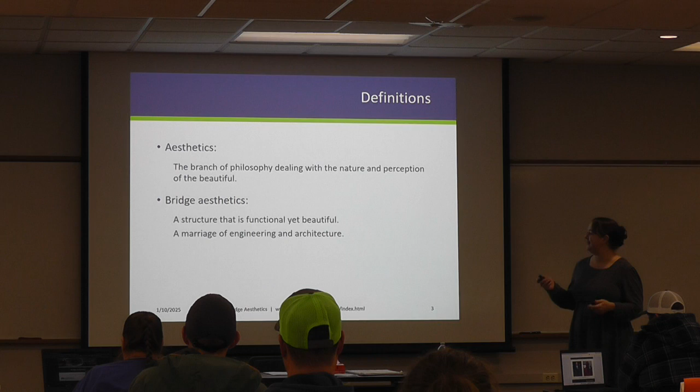So why do we do aesthetics? Aesthetics really matter, right? So somebody comes in for a job interview, who are you going to hire, right? You're going to go a little bit off of looks here, and you are definitely going to hire James Bond, right? And that is because looks really do matter.

So why? There's a few things. Obviously there is enhancing your environment, but there is a context-sensitive solution. MnDOT does not put a hot pink bridge in a state park. It doesn't work, right? So we're going to go ahead and use natural stones that are found in the region, natural colors. When you look at bridges in a lot of our communities, take North St. Paul for example. If you look at the North St. Paul downtown, it's a lot of concrete textures with brick. Well, what did we do when we built the highway? We did a lot of brick and a lot of those same concrete textures.

We really try and match the context of the area so that everything can fit in and really create a cohesive community design. Wayfinding is really important. So most of us do not give directions north, south, east, west, right? If I'm going to tell you how to get to my house, I'm going to say look for the field with the big creepy tree. It goes turkey, pheasant, duck, take a right. We're not using north, south. We do the same things with our highway systems. So we design a lot in corridors. So 36 looks the same, 94 looks the same for segments of it. So when you get on the highway, you can look around and go, man, I know where I am now. I recognize this visually. I might be going the wrong direction and I need to turn around, but these visual cues tell me where I am.

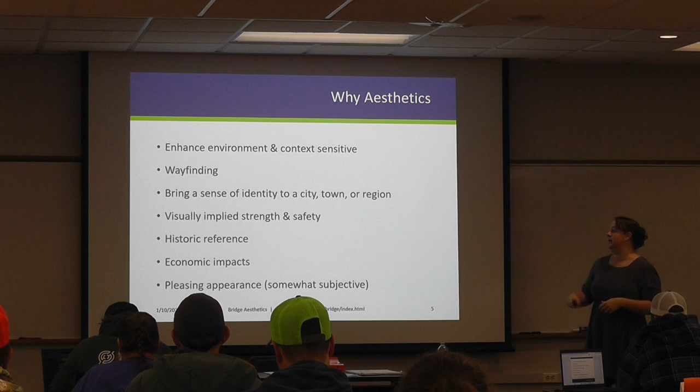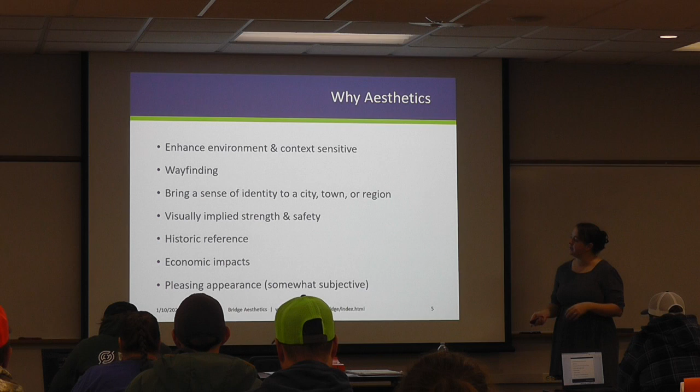So we beef certain things up to make it appear safer, and that makes the public feel more comfortable. Historic stuff, there are historic structures that have federal oversight, so I usually don't get involved, but there are specific guidelines for aesthetics when historic involvement is there. There are economic impacts as well.

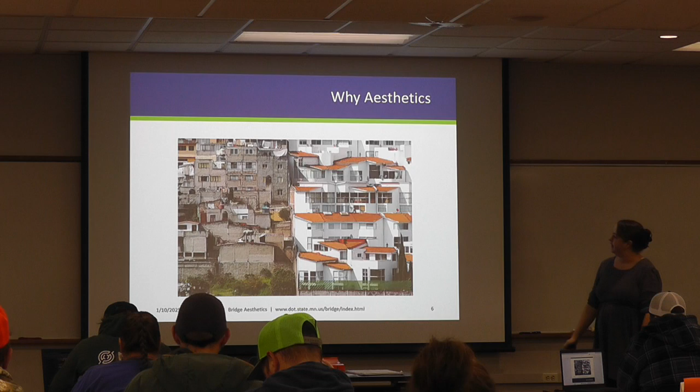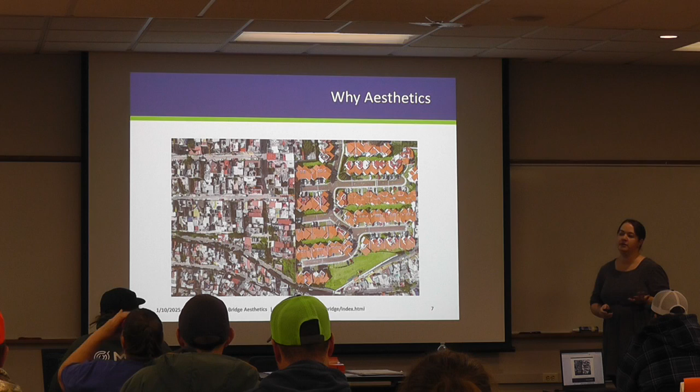Take this picture for example. These look like two images of two different neighborhoods that look split, but this is actually what it looks like from the air. We don't want to do this. In Minnesota, everybody, all the taxpayers, kind of get equal funding for aesthetics. We don't want to create higher funding levels in one area than another. It doesn't matter if you're in Starbuck, Minnesota, or Minneapolis, Minnesota, you are going to have the same type of funding and aesthetic level put into the process. The structure dictates what you get.

Here is a great example. These two communities are almost identical. They have very similar crime rates, very similar wages, all the different things are similar between these two communities. Amenities, all the things. If you're a traveler driving through on your road trip, where are you going to stop? Where do you feel comfortable, especially if you're a woman? Where are you going to feel comfortable getting out of your car? Where are you going to feel like you can come spend your tax dollars?

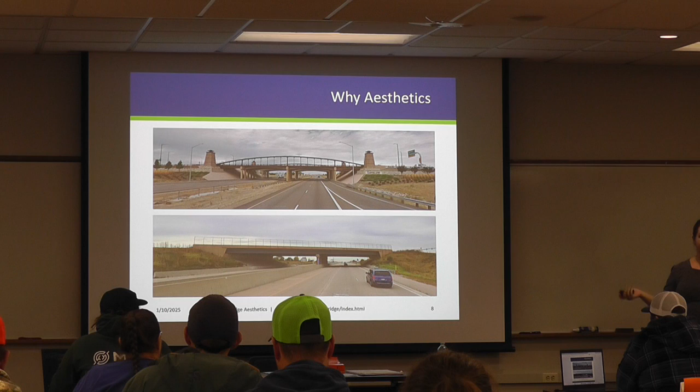You're going to go there, right? This is Loveland, Colorado, and this is over in Wisconsin, Eau Claire. So like I said, they're both very similar areas, but the aesthetics are going to dictate where travelers spend their money. That can really impact the neighborhoods, and it can impact the business owners that are right off of these exits.

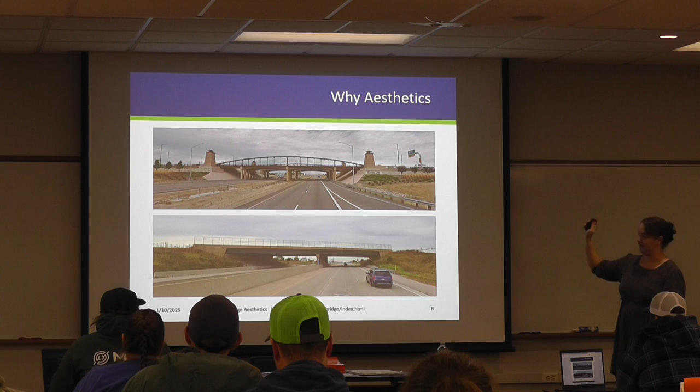So aesthetics are important. Now that is pretty above and beyond. MnDOT wouldn't pay for that, but they have a lot of pot money, so... it's true, it is true.

So we kind of have the 4 C's of bridge aesthetics. Context, like I talked about, that state park idea. Comprehensiveness, this is a big one. We don't actually try and spend every penny. Each bridge has an allotted dollar amount, and we don't try to spend every penny of it.

I have a good example of this. We had a bridge where there were some city councilmen involved, and we got really focused on the dollars. There was still some money left over, and he was like, well, what if we take these steel circles and mount them to the side of the bridge? And I was like, polka dots? We're gonna put polka dots on here? He was so focused on spending the money that he wasn't focused on the fact that the bridge design was already really great. We didn't have to spend that money and try to find ways to add features, we already had it. So we really want to make sure that design is looked at comprehensively.

Cost, we all have a budget, that's what we do. And again, constructability, don't try to make it harder. Although I joke with the engineers, if you make me angry, I will make it round.

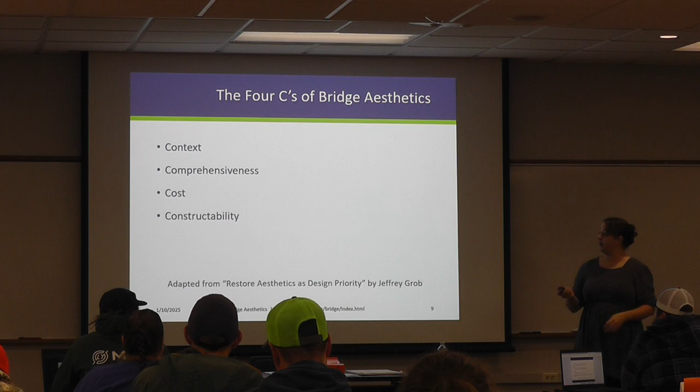So here's MnDOT's cost structure. We have level A, B, and C bridges. Your level A's are your Stillwater River crossings, your Blatnik Bridge, your really major river crossings, Hastings. The average bridge you're going to come across is going to be a B or a C. A B is everything in the metro, usually with pedestrians above or below it, a closer interaction, or it's in the metro where you have a high volume of viewers. A level C is probably only viewed from above or below. It does have some aesthetics, although most level C bridges don't get any, just because there's nowhere to really put it. They're usually small structures, tiny abutments, that sort of thing.

So how it works for most bridges is 7% of the total cost of the bridge, not to exceed $300,000. For the most part, the aesthetics you see around the metro fit within that budget, so we're usually not spending more than $300,000 on a bridge. If something does have a super high level, like Loveland, Colorado, that means outside partners kicked in funds. And when we get into the public art realm, that could actually be individual citizens, separate from any government entity.

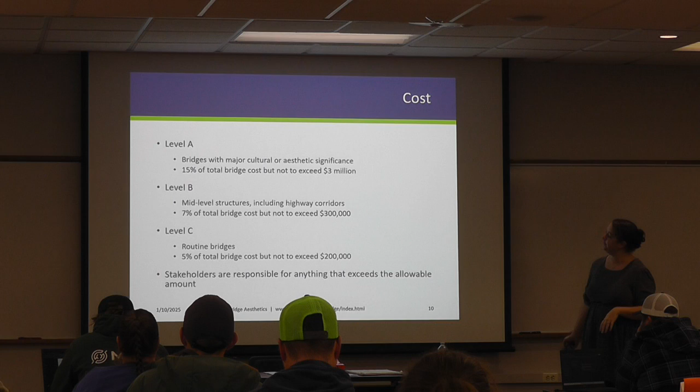Some things we do, like natural stone, we don't do that often. It's really cost prohibitive, but in this case we have done it in some places. This is up near St. Cloud, right near Granite City Quarry. You put granite on it, right? That just kind of makes sense. I believe we probably got really cheap stone because they wanted to use it as an advertisement right outside their business.

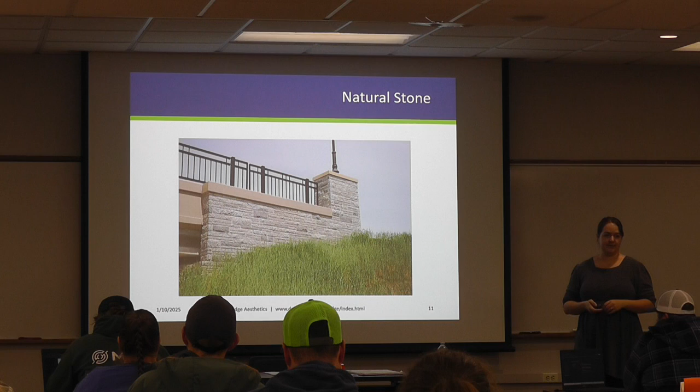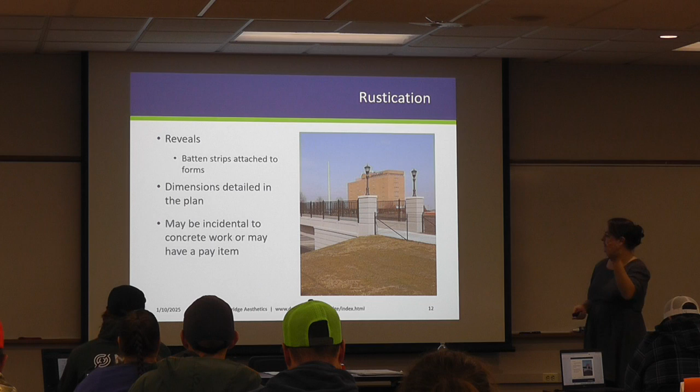Another thing that we do often is just batten strips attached to the forms. This is just going to break up big walls, kind of makes it look like stacked stone, fairly easy to construct. Usually doesn't have a pay item, it's probably just incidental to the concrete work.

Insets are another thing, just adding some insets to the form, trying to break it up, create some shadows.

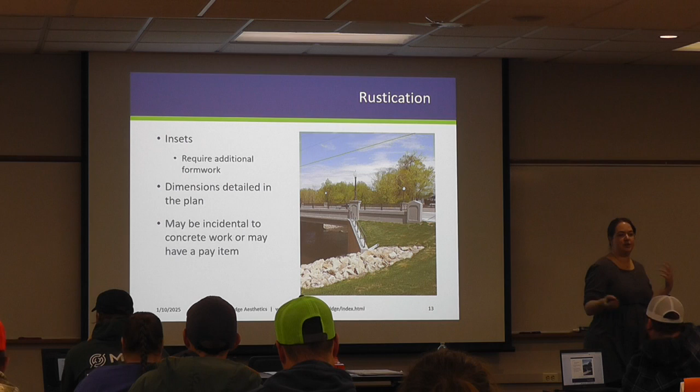We also know that, now this doesn't always work, but adding texture to surfaces reduces graffiti, especially if it's a very rough texture. It doesn't always stop graffiti, but it does reduce it because it makes their artwork harder to read, and it also takes a lot more paint, and graffiti artists have a budget too, and we need to remove that graffiti very quickly. So if you ever see cases where we put really heavy textures in some weird areas, that might actually be why. That might have been part of the conversation: graffiti reduction.

Especially when it comes to our new noise walls. Our new noise walls are noise absorptive. So if you actually get very close to them, they're very rough and have little holes all over in them. That's so the sound can go in and bounce around in that hole and come out. It doesn't reflect that sound back.

Ribbed textures were really popular in the 70s and 80s. Somebody not too long ago told me that this is warehouse chic. I think it's pretty well fallen out of favor in most of the metro. I don't have any communities asking for this type of texture anymore, but it's very common from bridges in the 70s and 80s.

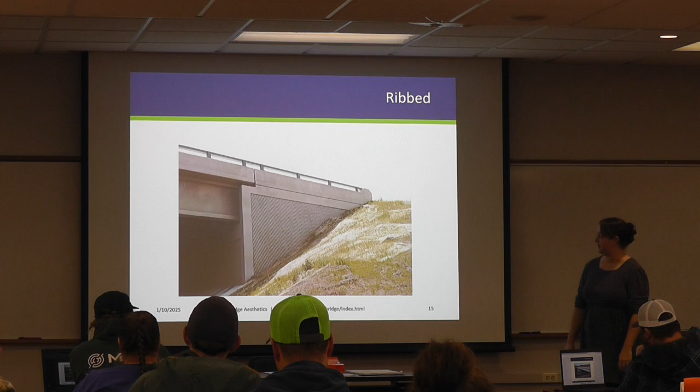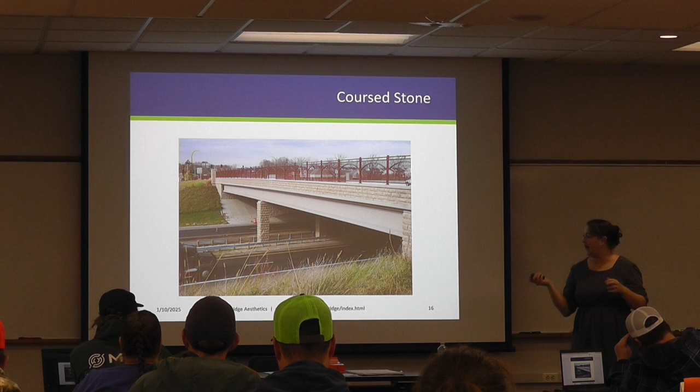Coursed stone - Minnesota has a ton of limestone quarries. So in mid and southwest Minnesota, in that whole area, you're going to see us use a lot of coursed stones, ashlar stones, just because that is the stone that is normally in the region. We are just replicating that with form liner.

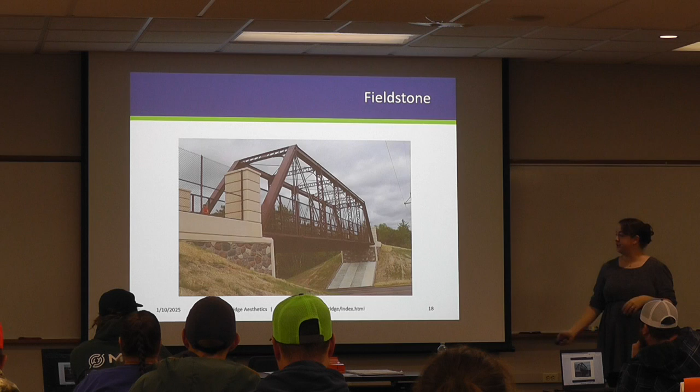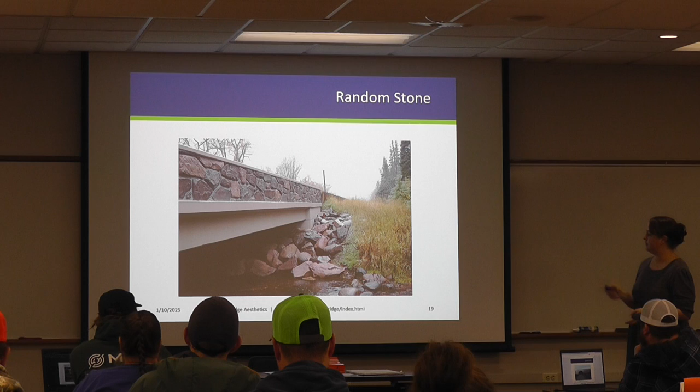Northern Minnesota, you're going to see a lot of field stone. This is all up Highway 61, on the North Shore. This is an example of exactly what you want to do. You can see that the local stone that was brought in for the riprap matches that form liner. That's what we talk about when we see cohesiveness, comprehensive design, context-sensitive design. This is a project where everything is done right.

We do occasionally do custom form work, usually not, because that will bump it up outside of the aesthetic allowance. It also takes a lot of design time, and I'm only one person, so there's only so much that I can do. This will occasionally happen when you have consultant firms, but not too much because it is more expensive.

Form liner materials - this is where you really want to watch out for in the field. This is EPS foam. We do not allow that on our projects. We will look at it on a case-by-case basis, usually on a smaller project where there's not a lot of forms, probably not going to be replicated, and it can't be near water. If you look at that, obviously, when you start tearing it off, those little beads are going to be floating down your waterway. That's a big no-no. If it's a smaller project where we can contain it, we will allow it.

It used to not be allowed at all because form release agents weren't great, and so those little beads would get stuck in it, and it would just be a huge pain for everybody. But now technology has gotten so much better that we will look at that on a case-by-case basis. Always ask, because of the cost difference between that and what is in MnDOT specs, and most other places do use MnDOT specs - a lot of cities, even North Dakota uses our specs in a lot of cases.

Make sure you're getting a discount because that cost difference is very big. So that is very commonly snuck in as something that they want to use because they know they're pulling the wool over your eyes and getting something for cheap.

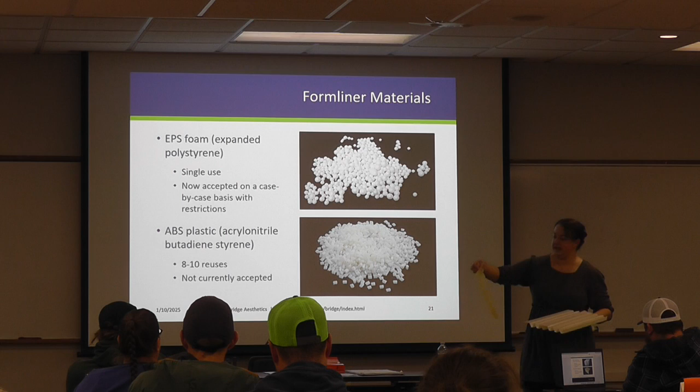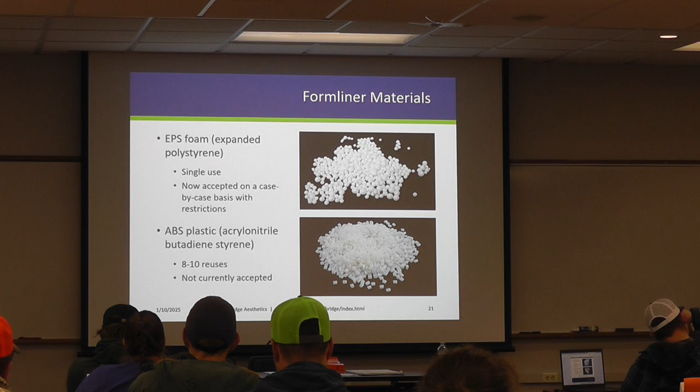ABS plastic, this is something that we do not allow. We would potentially allow it in something like this where they could backfill these, but it becomes very brittle, and you can see it will break. We found over time most of this does not stand up to concrete pour pressures. Sometimes it will be allowed, but usually not. They'd have to make a case for it.

HDPE plastic, this is a newer one. We haven't used it very much. This is a very, very heavy plastic. I always say this is like a cast iron frying pan - you want to keep some of this by your bed, and if there's an intruder, whack them with it, because this stuff is heavy duty. Usually this is going to be very unique forms, cut with a router of some sort, and you can do unique shapes. As far as I know, we've only used it on 2 projects so far where there were kind of curves and very unique shapes. But if this is ever requested, let us know, because we do want to see how it works over time.

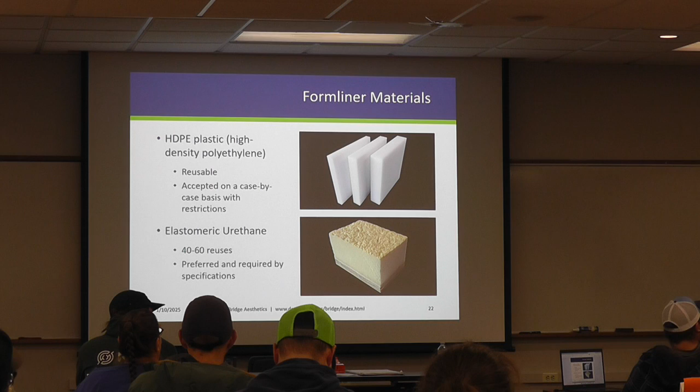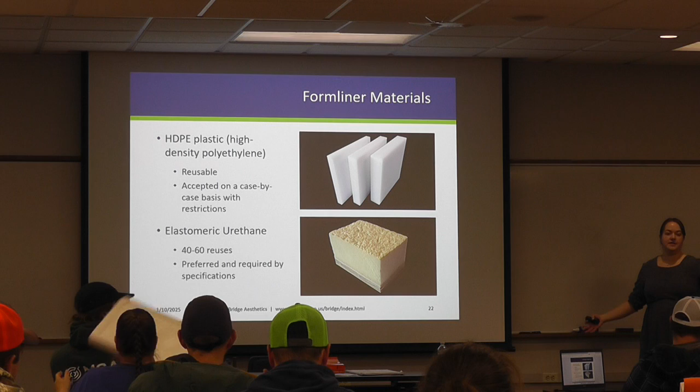And then this is elastomeric urethane. This is what is in our specs as the standard product. This is created, most of it, in Minnesota or just over in Hudson, Wisconsin. That is a reusable product. Please make sure that they are throwing them away at the end of their shelf life. They can use these over and over again, up to 40 to 60 reuses. Since a lot of our corridors are in the same textures, they will try and use them past their life, so just make sure the really bad ones are getting thrown away.

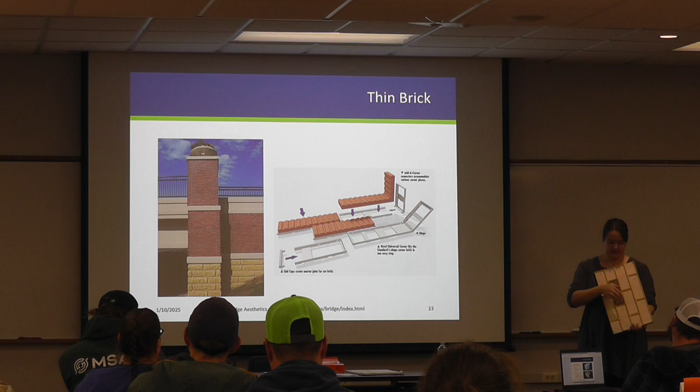And then thin brick. This is a super popular product because Minnesota made a lot of brick. You go into any tiny town in Minnesota, it's brick, right? We made a lot of it here. This product is finally something that is affordable for us to use and is lasting very, very well. And then graffiti removal is just pressure washing - there's no anti-graffiti coatings or repainting or anything like that, so it is very, very nice. How this is actually done is these little pieces are stapled to the forms. The brick is set in the little piece, and then the concrete is poured, the form is pulled off, and your brick is stuck. So the actual concrete makes up your mortar joints.

This is all of Highway 36, Valley Creek Road and 494. So when you look at the cost difference between these two, you have your brick, which does have a higher cost of construction. But then when you look at the form liner below it, you have the construction cost, the painting cost, and now the anti-graffiti coating cost. So cost-wise, they actually flush out as pretty even, but there is a little bit of messing around with those bricks. We are getting better with it over time as we work with it and kind of figured it out.

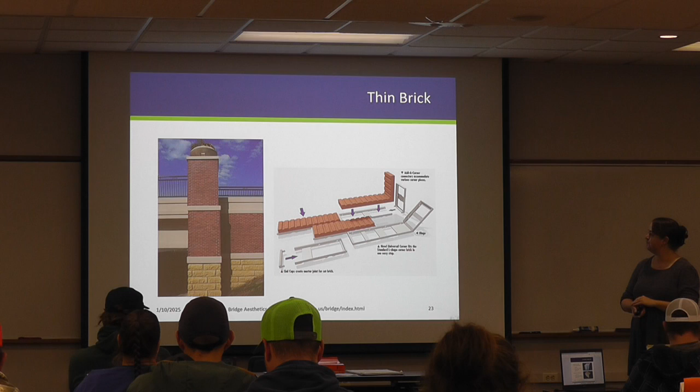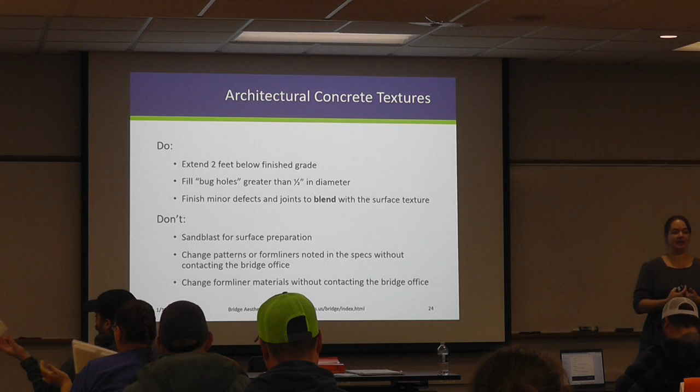And then any changes, please contact the bridge office. It might not seem like much of a change - most of the time we're approving them, but sometimes there's bigger issues. So if they say, hey, we want to use this texture here, and it has 3 inches of depth, and we only specify 2, we now might not have enough cover over our reinforcement, so we want to deny that. So that's the type of stuff we're often looking for when changes are requested.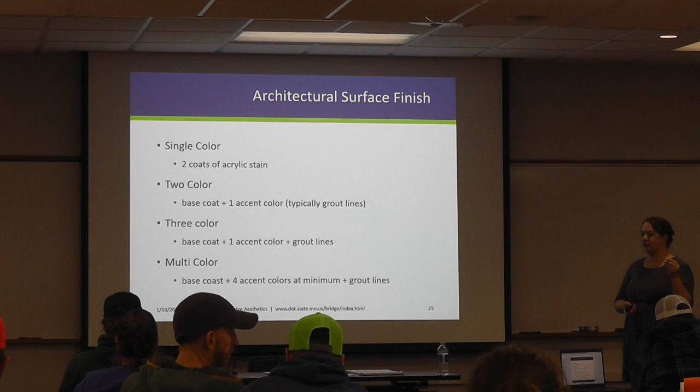Then we have surface finishes. MnDOT has 2 different types of finishes: architectural surface finish and special surface finish. The easiest way to remember this is architectural surface finish goes on architecture, so that's what's going to go on your form liner treatments. That is more like your paint, the paint you find in your home. It's very thin, watery, and we have single, 2, 3, and multicolor options.

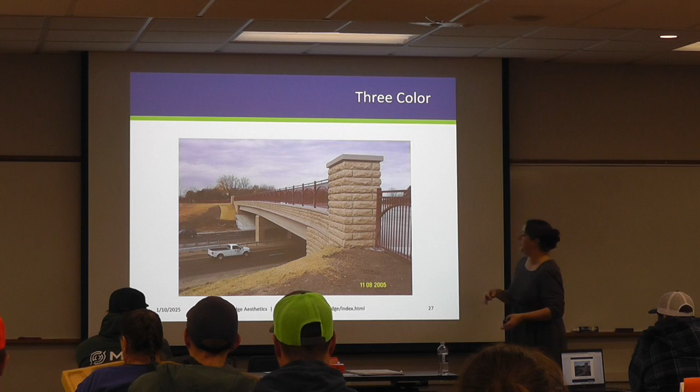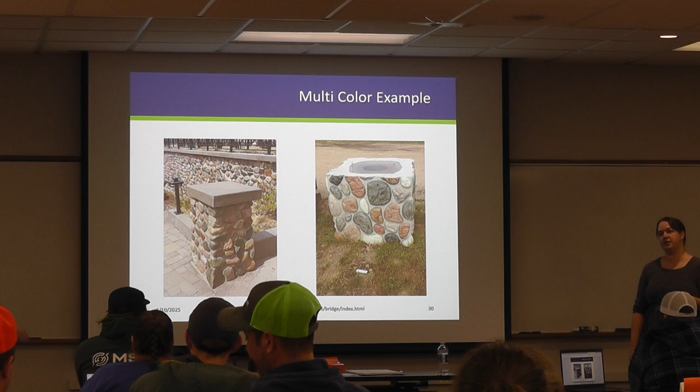Anti-graffiti coating - this is a clear permanent sealer. We're only putting it on multicolored surfaces. Our maintenance forces have no idea where this is, so we only put it on multicolor, and that's because they can't just go out and paint over it.

Graffiti is a public safety hazard, which I did not know until I started working here. Some of it's just teens being teens, but some of it in certain areas of the city might say buy a gun here, buy drugs here, buy a girl here, whatever. So we want that removed as fast as possible.

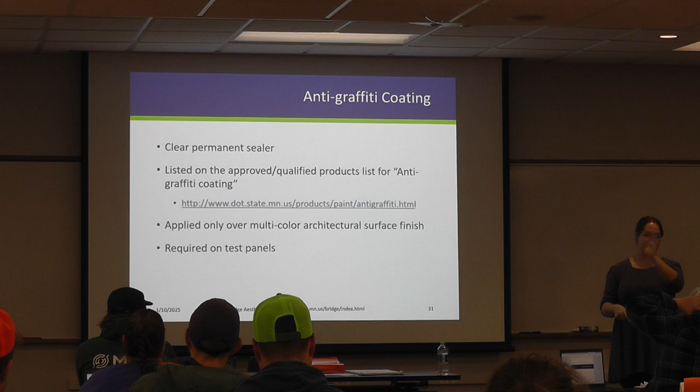So for single color, they just paint over it with single color, because usually they're also doing traffic control - they'll set up traffic control, go out, quick paint something, come back. Only multicolor gets the graffiti coating. And also our state entrance signs, those are completely covered in graffiti coating. I don't even know why I know that.

Special surface finish - now this is a thicker coating. I don't think I have a sample of it actually. This is what is going to go on your smooth surfaces. This is no longer just paint - the new technologies actually protect the life of the structure.

So they have chloride protection in them. A lot of people are like, why do we paint our bridges if they're going to look poor over time? Well, in this case, it is actually extending the life of the structure now, so it's not just paint. What we tint it doesn't matter, although nobody has taken me up on hot pink yet.

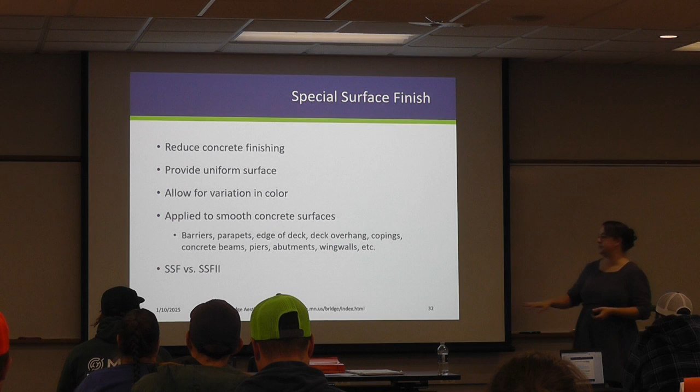Someday some city will give me money to do one, but so far no luck. So when we look at special surface finish, it's a thicker coating and it has a texture to it. We can even specify really heavy textures in it, but usually we use closer to a sand texture depending on where. This reduces concrete finishing, provides uniform surface, and you'll notice in our specs we have special surface finish and special surface finish 2.

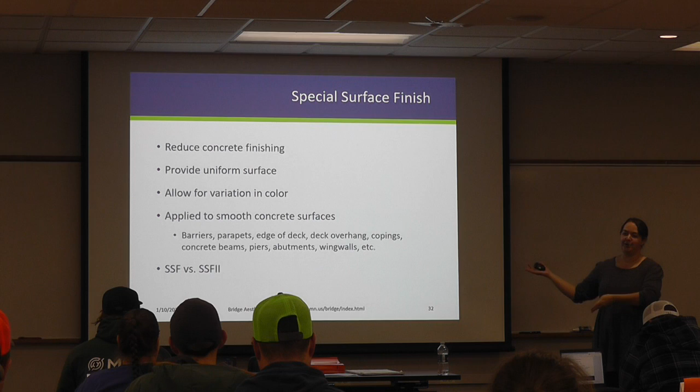So the 2 is the new technology, that is pretty much what most people are using. We do still allow the older bucket 3-part mix system - that is still allowed, but most people aren't using it because the Tex-Cote product is so great. But we cannot remove that as a product we allow because there is only one approved and we cannot single source. So if you want to make millions of dollars, you can create a competing product for special surface finish 2, and then we would have more products and you'd be a millionaire.

So SSF2, you can use it as a curing - lost my word - a curing compound. So you don't need curing compound if you use this. You can actually put the color on right away, which in Minnesota is huge, right? We're always chasing winter, so that's one of the benefits - you can just apply it right away. You don't have to wait like you would with a traditional paint system. It does have the factory mix.

Its long-term performance is better than paint from what we've seen so far. We've had it out there on Hanson Boulevard, whenever Hanson and 10 was built.

We are currently not using it for dark colors. So if we specify dark colors, specifically up on the Iron Range, we tend to use a color that looks like iron ore. In that case, we will not use it. For whatever reason, the pigments used to create dark colors do not hold up. We had a bridge where we put the iron ore color on it, it was great, and then it rained and washed it off. So that was not so great. We cannot use the SSF2 on dark colors.

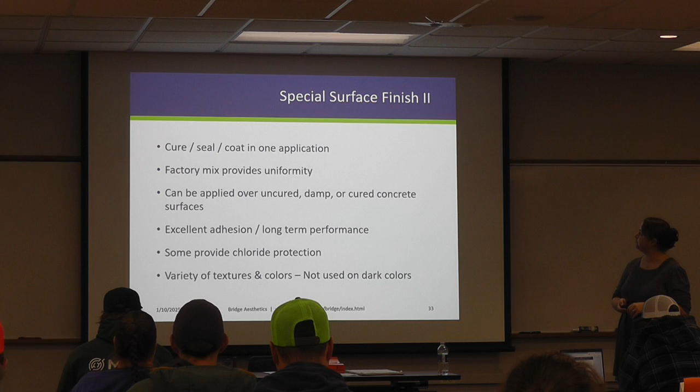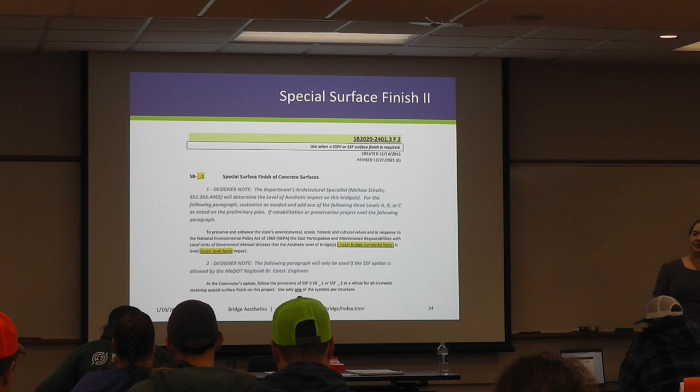In the specs, you are always going to see the bridge level in here, the aesthetic level of those bridges, A, B, C. You're going to ask yourself, why does that matter to me? The reason is because that is how we approve products. So when we're looking at our approved products list, we only have Tex-Cote.

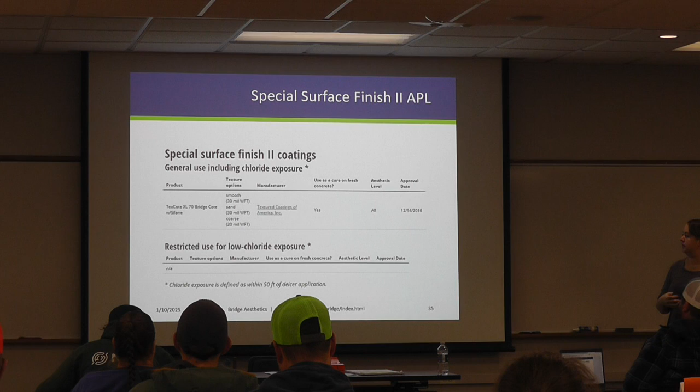We'd love more, but right now we only have the TexCote for the SSF2. If a new product comes along, they can only be used on level C bridges. We'll analyze them, make sure they're working great, and once they've been out there for two years and we're not seeing problems, then they can go to level B, and then level A.

We will not let somebody put a new product on something like the St. Croix River crossing, because what happens if that fails? You're over a waterway with a failing system, major public scrutiny, all of the things. So we make them start small. That is why our specs specify an aesthetic level in them - it's because that's how we're approving new products.

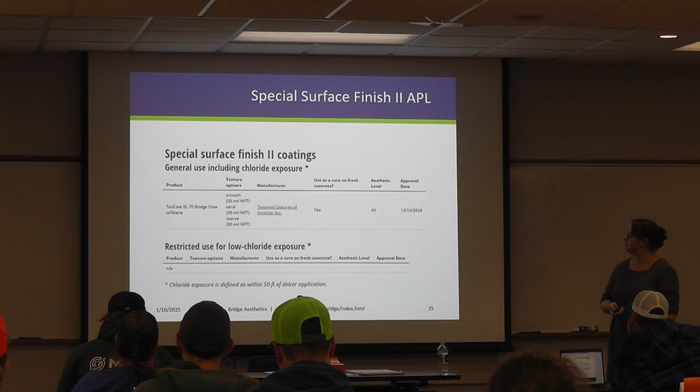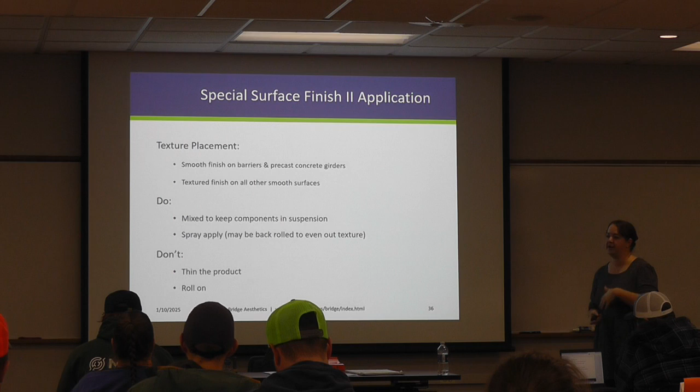So we use smooth finish on barriers and a textured finish on everything else. The reason for that is salt. We don't want any texture, because texture is going to let salt sit there and wreck everything. So we want smooth on our barriers, which take the biggest hit from salt, and textured finish on everything else because that helps hide any imperfections.

Another thing to do is mix to keep the components in suspension. Since it does have a texture, Mark was out on a project once where they had a 55-gallon drum and a drill bit mixer. Well, that wasn't really getting what was on the bottom, and when you start painting, you're going to get this weird patchwork of stuff.

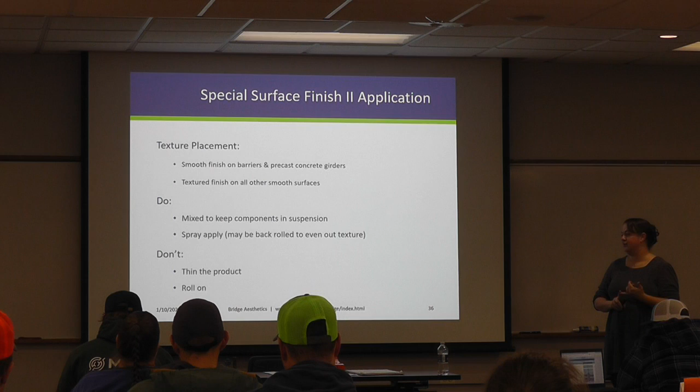We do spray applied, and they can back roll it, but we do not allow roll applied. We tried it, and even though some manufacturers say you can do it, we just did not find the performance that we wanted. Also, no thinning the product, and no rolling it on.

You're also going to see that SSF has batches that are sampled, and then there's a monetary deduction based on delta E's. Now what are delta E's? If you have a color, they have a special fancy gun that they can shine at it, and it'll tell you if the color is correct. Then there's monetary deductions if it's off.

Now why are we fining contractors when a color is not perfect? It actually has nothing to do with the appearance of the color. It's just the easiest way to figure out if something has happened along the way to the product. We were having problems where products were being thinned, products were not performing properly, they were peeling off, colors were changing, all sorts of stuff. This is the fastest method we've figured out to make sure the product is correct and that nothing has happened to it over time.

So it really isn't about color, it's about making sure that we're getting the chloride protection and the surface that we're looking for.

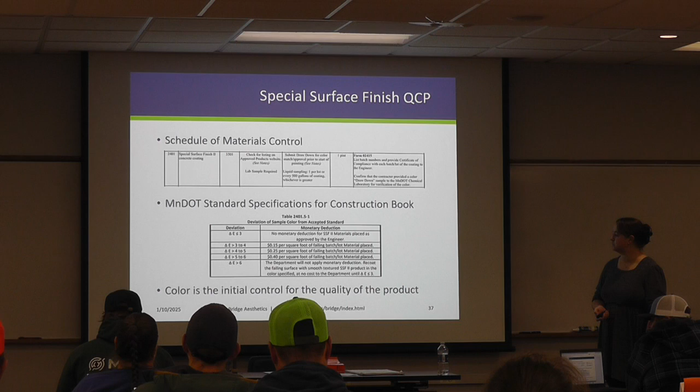MnDOT does have a standard color palette now that we've been using for, I'd say, at least 8 years. When I first started, I started looking at all the colors and I was like, why do we have 18 different dark browns? Can we just pick one? And then that hopefully will help maintenance forces going forward.

Now, a community can choose to use a different color. It just makes the risk greater that graffiti is not going to be covered over with the right color.

And we're getting better and better at that every year since we've slimmed down our palette. One thing you're going to notice in the field is federal standard colors, AMS colors, and RAL colors. Why all the different ones?

Back in the 60s, the feds created a color palette, and MnDOT started using it. Then several years ago, the feds said they didn't want to maintain it anymore, so they renamed it the AMS color palette. Same thing - if you have a federal palette or an AMS palette, they are the same thing. Color 3522 is the same in both books, it's just who owns those books. So you don't need to get a new book if you have an old federal one. AMS and federal are the same.

Then comes railings and the powder coating industry. Powder coating decided not to use the American standards, but the European ones, so they chose to go with RAL standards. That is the only reason you see RAL, and that's only done on products, specifically railing, that use powder coating. I've tried to simplify it as much as possible, and then people throw in wrenches, but we're getting better.

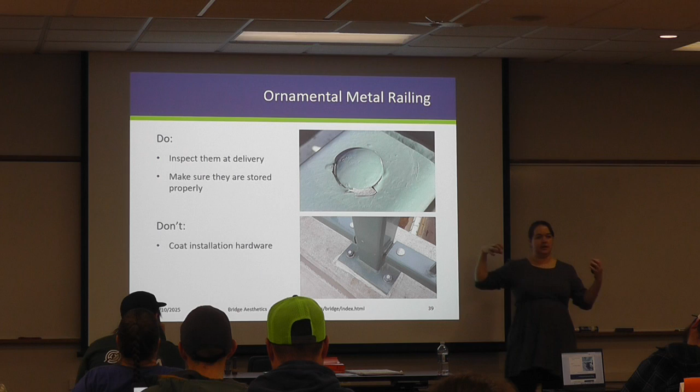Just a quick note for everybody - if you get damage on your powder-coated rail, please call myself or Andy Fritz, or you can reach out to Melissa as well, and she can probably just transfer it to us. So call them, yeah, because we get a handful of them a year.

Architectural paving. You can do this a couple different ways. You can do stamped tooled masonry, but we don't do a lot of masonry here. This is Minnesota, it snows, we plow, it's not great. I get pictures from places like Texas and Arizona all the time, and I'm like, that's a really great picture. This is Minnesota, you can't do that.

So we will do some stamped occasionally. We no longer do integral color because we know it does not hold up over time. So a lot of times we're going to use stains or color hardeners.

This can actually serve a public safety purpose. This is not always an aesthetic feature. For example, we had a project with a senior living community on one side and a grocery store on the other, so you had seniors going back and forth all the time. As we age, we no longer see drops very well, and they did not have a very wide sidewalk in the first place. They had a problem where people were falling off the edge of that sidewalk into the travel lanes, and adding a feature like this and creating visual contrast can really help in a situation like that. Another reason is to keep children away from the edge, and the blind can use it as a guide. There are so many reasons something like this could be used in a specific location.

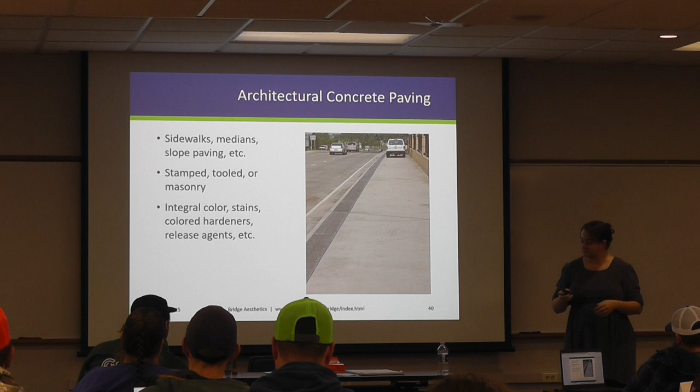And part of that is often a precast cap. We will occasionally do emblems and things like that. We are currently working on three different policies regarding names on bridges, words on bridges, and emblems on bridges. So that might change as we go through, because communities have started to get a little crazy in that way and started trying to one-up each other with lighting, family names, city names, and emblems.

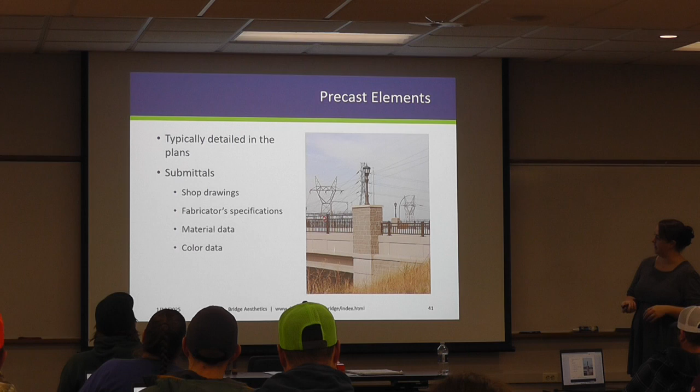Roadway lighting is the only thing paid for by MnDOT. Pedestrian lighting is not, and the reason for that is the roadway pole casts enough lumens onto the walking surface to technically make it safe. These lights are not needed; they are technically an aesthetic feature based on lighting standards. Does it make us feel safer? Yes. But technically you can see the path and you can walk.

So pedestrian poles and architectural lighting are always paid for by an outside entity.

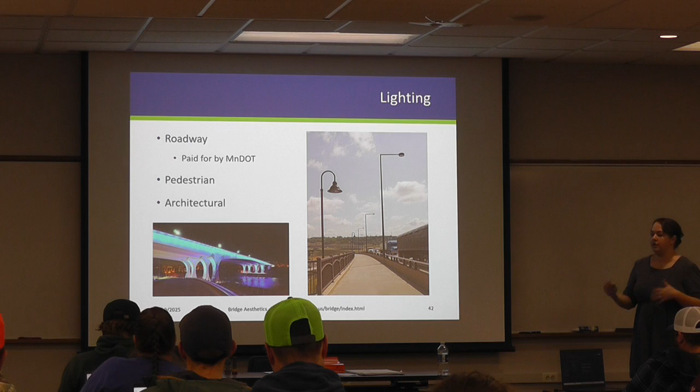Public art, this is difficult. MnDOT does have a public art policy, so anything designed by an artist is public art. What's the difference between aesthetics and public art? Aesthetics is the modification of a necessary structural element. You need a railing, what does that railing look like? You have an abutment, what does that abutment look like? Art is going to be above and beyond that. That might be sculptural. We've had artists design railings, we've had artists design form liners.

If an artist is involved, it kicks into federal law. The feds came up with a law called the VARA law, and that gives artists the right to their work. That is really bad for a state or government agency. Basically, let's say this is my house, and I hire an artist to paint this wall. The artist now owns the wall in my home. I can't remove that wall, I can't paint over it, I can't do anything. They have federal rights to that art, and by default, that wall. The same thing applies to our structures. So we have to stick to this policy because we require them to turn over their rights, so that we don't engage in legal battles, because there have been battles in other states.

There's a very famous project that also involves graffiti, called either the 5 Points or 6 Points project out in New York. There was a developer who had an old abandoned factory with silos and all sorts of stuff.

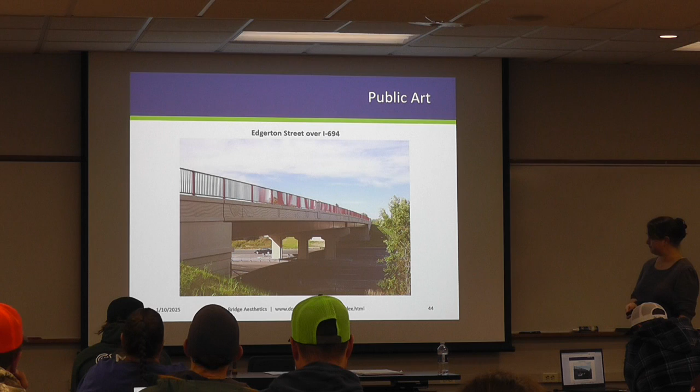As-built sheets: from aesthetics we have the surface finish, roadway, graffiti, and paint. Please do fill these out. I use them constantly. I used at least 3 of them yesterday. I use these all the time to see what something was painted, especially if something has changed.

We don't have as many changes now because over time aesthetics was added through the design process. Now we have it all done by preliminary plans if we can. That means there are fewer changes through final design and going into construction, but I try to have it all 100% wrapped up at the signature of the preliminary plan. That helps all of us through the whole process by not having so many changes. But sometimes things do change.

For example, we had a bridge where we designed it, picked the color, and then the city came in and said, oh man, we just got funding to do 3 of our bridges and we chose this other color. So during construction they changed the color of our structure. Then we came back 2 years later to build its twin, and I'm like, I don't know what color this is. So now I've got to drive to Mazeppa and do a color match so I can put it in the specs. That's just wasting everybody's time. So I do really use these, please fill them out. That's definitely used by a lot of people.

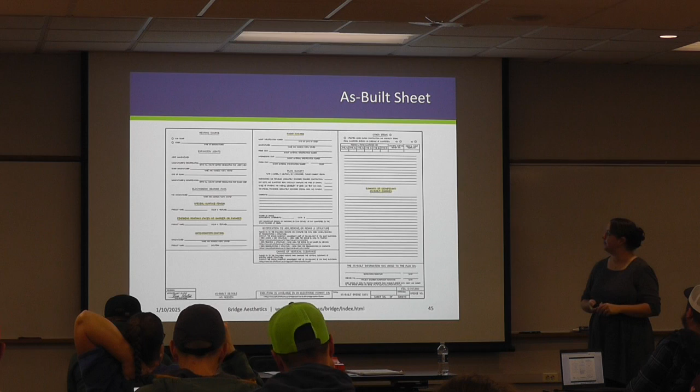So I'm going to go through some project examples, just kind of tell you why we did what we did, so you can appreciate some of what's out there.

This is the Highway 100 corridor. This was MnDOT's first highway, and that was a big deal. You used to take your Model T and drive down Highway 100, pull off and eat your lunch and have a picnic. That was a destination to drive down the highway because you were probably pretty lucky if you had a car. So when we redid it, we took some of those traditional elements found in the original highway, which was called Lilac Way - there's a lot of lilacs on this corridor. We took the same stones, the same kind of textures and things, and basically gave it a facelift to current times.

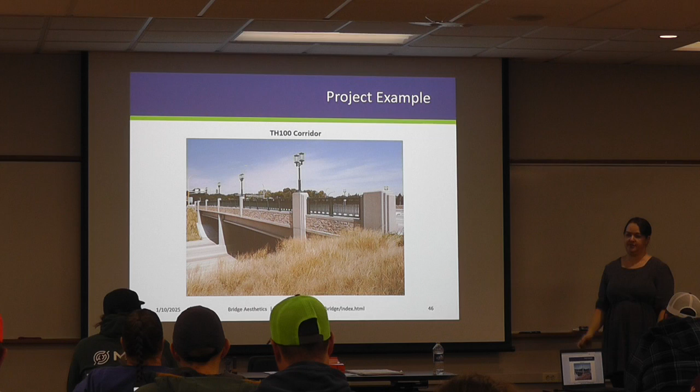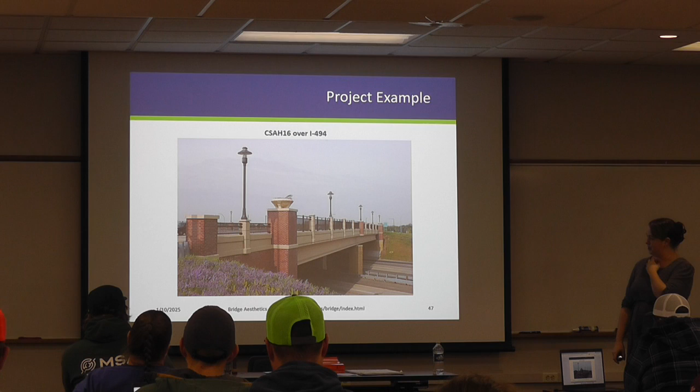Valley Creek Road over 494 - this was one of our first brick projects, and it has those planters on it. We really chose to upgrade it. It's probably one of the only cities I've ever seen us do a planter and them actually take care of the planter. So that's impressive.

This is up in Lino Lakes. You see the emblem up there, kind of a Reeds emblem in their light fixtures, and blue herons. That all goes back to city identity—throughout Lino Lakes it's blue herons and Reeds incorporated everywhere you can, so when you get there you know you're in Lino Lakes. White Bear now has bears, Monticello has swans. These things are really getting incorporated into the infrastructure, and it helps as a wayfinding feature—you get to White Bear and you're like, hey, go bears.

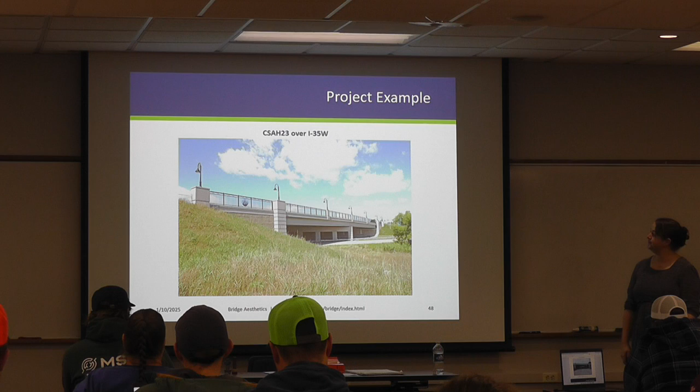This is on the north side of the 35W bridge, the collapse bridge. A lot of people don't even realize there's another bridge there, but this was replaced as part of the collapse. This bridge has its struggles—it had a lot of problems with graffiti, it's a great place to see a drug deal. But what FIG did in the design is each little tile was designed by a neighborhood child. They brought in kids from the schools and each designed a glass mosaic tile, which was placed on the structure.

That took a lot of coordination and effort in the beginning, but long term, there's not as much graffiti on this bridge anymore, because people are going out there saying, I did a tile here, my sister did a tile here, my neighbor did one here. We saw a drastic reduction in maintenance needs as far as graffiti is concerned. Still not a great place—don't go down here at night—but the graffiti problem partially went away. So there are real impacts to having public and community involvement in these things, and it trickles through to other areas.

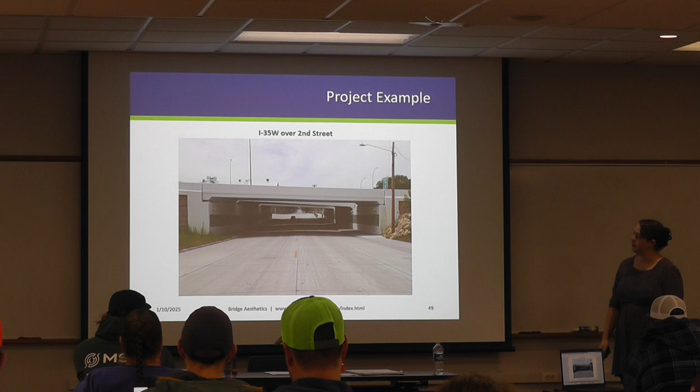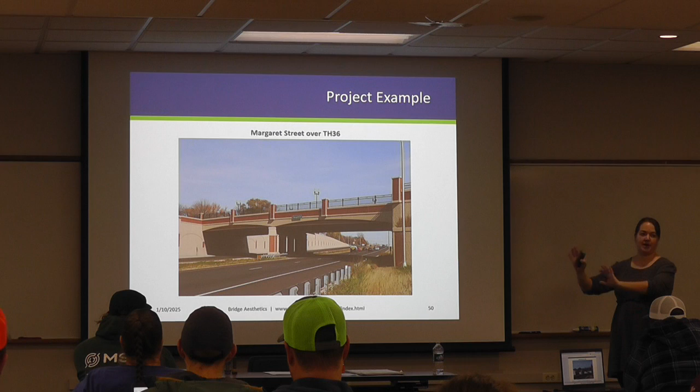Margaret Street, like I talked about, into the little community of North St. Paul—these are the colors and textures you're going to see. When we added the highway, we brought those colors and textures out. And the snowman is right over here too.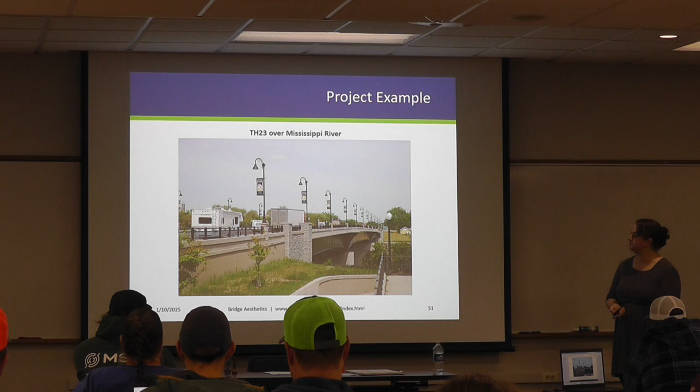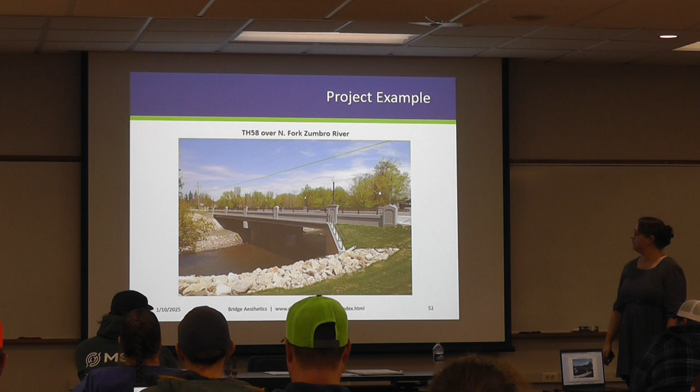This is one of my absolute favorite bridges. It was originally created and dedicated to soldiers, and when we replaced it, we took all the exact same features and just made them bigger or taller as needed to meet current safety standards, then rededicated it back to soldiers. There's actually a tank sitting right there on the road. So even though the aesthetics look really simple, it had a lot of meaning then, and we try to keep that meaning now, putting the plaques back and those types of things.

There's an aesthetics manual coming this year, finally. This was kind of a big deal—as far as I know, it will be the only fully comprehensive aesthetics manual in the United States. I haven't been able to find any other one. So we're kind of on the forefront of establishing aesthetic standards, but also trying to leave it so you can really customize and create things for communities, which helps inspections, construction, and design, while finding that balance of creativity.

There will be guides in there—if you're adding brick, this is how you incorporate brick. As we have these lessons learned, if you call me and say, hey Melissa, every time you add brick to a project this happens, okay, let's fix it, and we'll write it down in this manual so whoever comes after me knows all that information. It's not just stuck in my head. So I'm very excited for that.